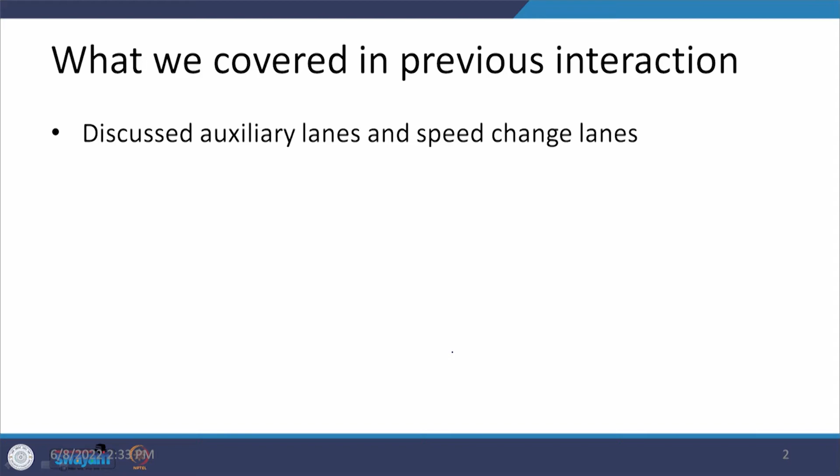Dear students, let us continue with the intersection layouts. In the previous interaction, we talked about the auxiliary lanes, as well as the speed change lanes, and in this category we talked about the acceleration lanes and the deceleration lanes.

In today's interaction, we are going to talk about channelization. Within channelization there are different types of islands which can be provided to control the traffic in terms of their path or direction. We are going to talk about corner or directional islands, center or divisional islands, and the various practical issues observed along with remedial measures so that intersections become safe and traffic movement remains efficient.

Apart from these, there are a few other things also which we are going to take up in another interaction. So, let us start with channelization.

Now, what exactly is channelization? It means we are trying to segregate or channelize the traffic flow, which is also defined as a stream, with different movements at any intersection. If we try to do this by use of different devices or physical features, this is what we call channelization.

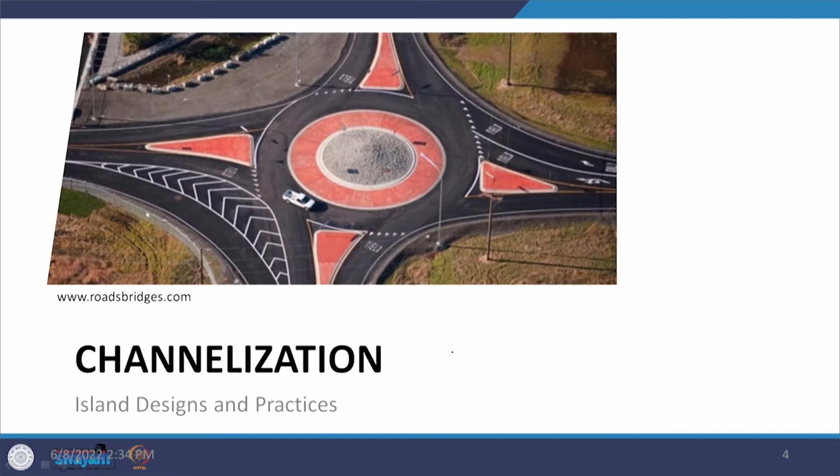If you look at this photograph, it tells us what type of channelization can be there. Here you can see there is a central island, other islands provided at different locations, and markings also taken here. All of these together define in which particular area, in which direction, and how those vehicles are going to move.

So, what are the objectives of channelization? The objectives are controlling the speeds of vehicles, and we may also control the path of vehicles so that whatever conflicts arise because of those paths can be omitted.

We can provide separated lanes so that conflicting traffic does not come onto the same lane. We can accommodate vehicles for different maneuvers, or reduce excessive carriageway areas to assist pedestrians to cross at a defined location, or place traffic control devices on these islands for segregation of traffic or directing it in a particular direction.

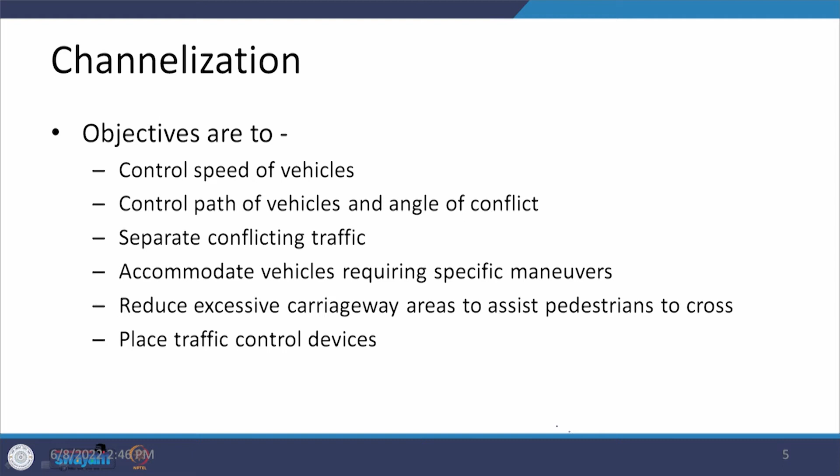Keeping these objectives in mind, let us try to see the various forms of channelization that can be there, and how we incorporate various things at an intersection so that the system remains effective. We have two photographs here.

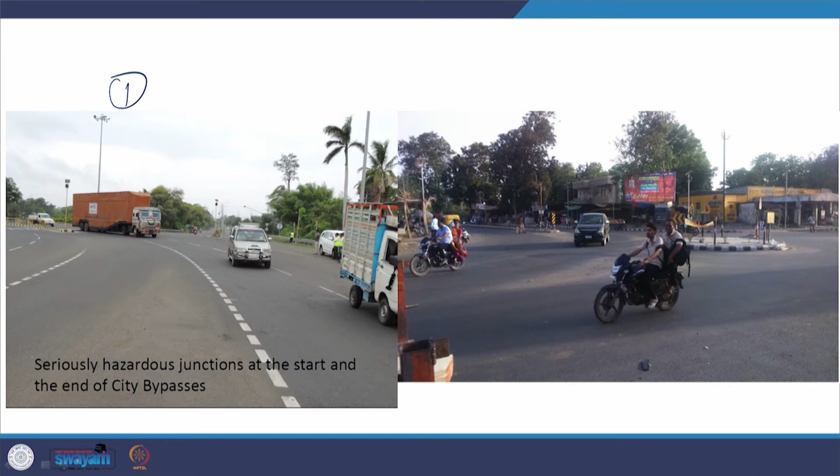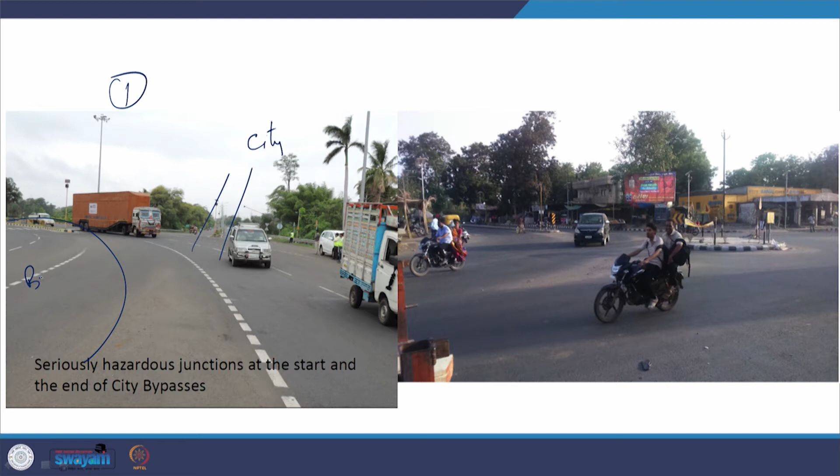In the photograph on the left hand side, you find traffic moving on this circular road, and at the same time there is a road going inside. So there is a city here and this is a bypass. The connectivity of the city with the bypass has been provided, but there is a very big area here where a lot of interactions can occur if drivers start moving in different directions in different manners.

This is not going to be a safer condition because one vehicle has to go in this direction, another is coming in this form, this vehicle can go in this direction also, whereas this vehicle can turn in this form. So no segregation has been provided for different types of movements at this intersection, and this intersection is not going to be that safe.

Again, in photograph number 2, you can see there is a central island being provided. There is a median here with the required markings, hazard markings, which we have discussed under signs and markings.

But the issue is that whatever traffic is coming from here is getting ample opportunity to make this type of movement rather than coming in the proper form, and at the same time there is traffic which can go in this direction. So this is going to be a hazardous location — a conflict point because of this undisciplined movement being taken by a vehicle.

So this island which has been provided here should have been enlarged, or there may be some other mechanism done so that these types of movements are not allowed.

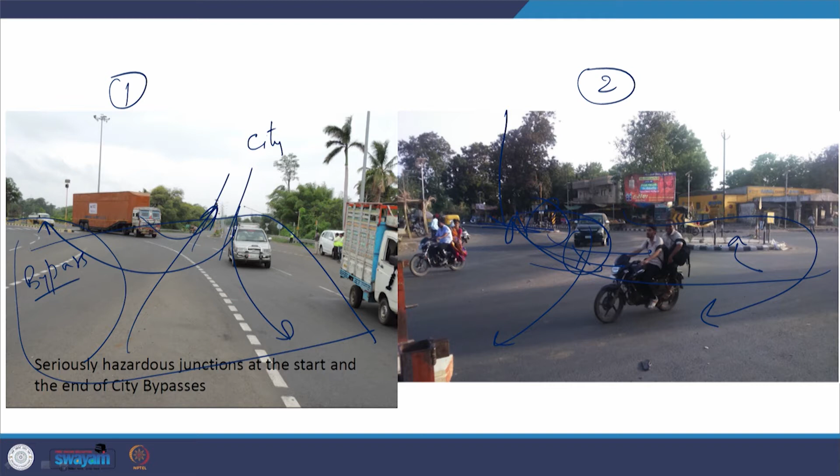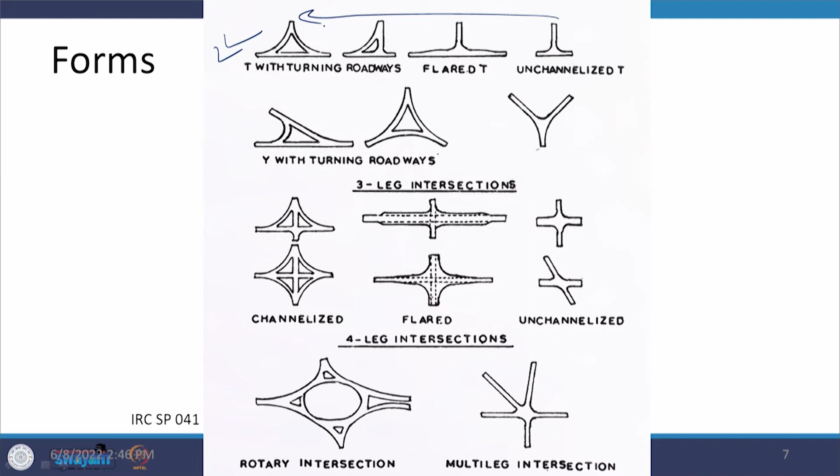These are the different forms of channelizations. We have looked at these forms previously when we talked about at-grade intersections. The point here is that we achieve the highest conditions in terms of segregation of traffic and their movements by way of channelization, moving from an unchannelized situation to these channelized situations, depending on whether we are talking about a 3-legged, 4-legged, or multi-legged intersection. So this is what we are interested to look at here.

Again, in this case what you can see is that here the right turning has been provided, in this one the left turning has been taken care of, but from the rest of the conditions like here and here, those things have not been provided.

Along with that, there are these types of islands which are just separating out the opposing traffic. So we have medians, we have these corner islands, and we have the divisional islands, and all of these together are providing you smooth movements.

Here also the same things can be seen, that there is a big island being provided, along with a smaller one here, and the traffic is moving all around it in terms of either these movements or these movements, and that is where things have been made better.

This is another case where a flared section has been provided, and at the one side the traffic can move either in a broken up condition, or some other reason is there due to which traffic can go in that direction, or it can be an emergency condition.

On the right hand side, in the first case a big area is there which is a conflict area, and this big conflict area has been reduced to a smaller one by way of the provision of these divisional islands, which are also controlling the path. So the path of the vehicles has been controlled and the conflict area has been reduced.

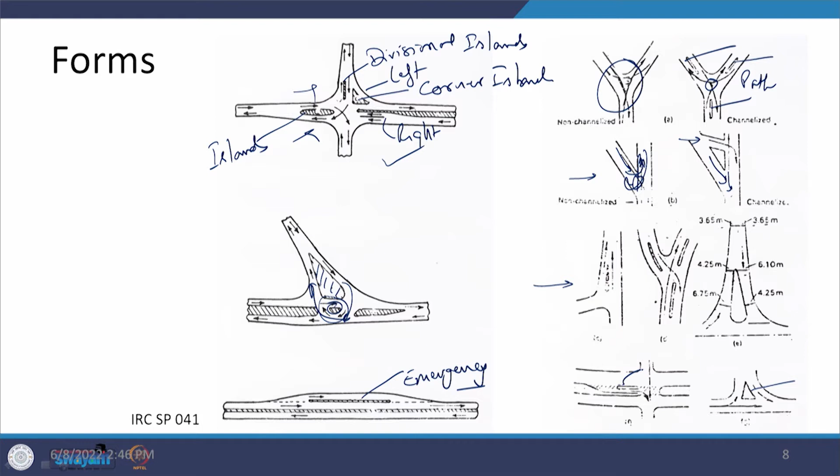So these are the things which we are going to talk about further when we take up one by one all of these types of islands.

Here, this we have looked at previously, but at that time in terms of conflicts. Here what we are talking about is that these two lanes being provided, if they have not been segregated out by way of markings or any other manner shown here very clearly, then these types of conflicts which otherwise are possible at these locations have been segregated out, and when they have been segregated out from each other, the number of conflicts is going to be reduced. So that is the advantage of doing the channelization here.

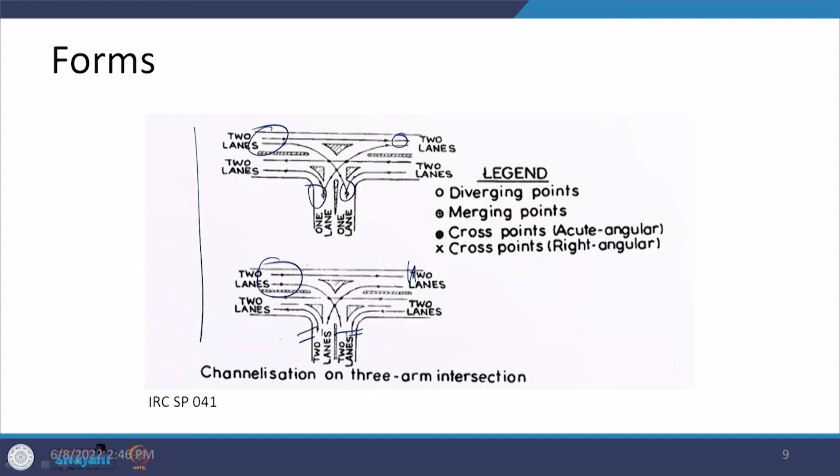So let us talk about the various types of channelization principles. They are related with the corner or directional island, the center or divisional island, or the third category is the pedestrian refuge island, which we have discussed previously when we talked about medians, and then the influence of the various types of traffic on all of these things, that is what we are going to look at.

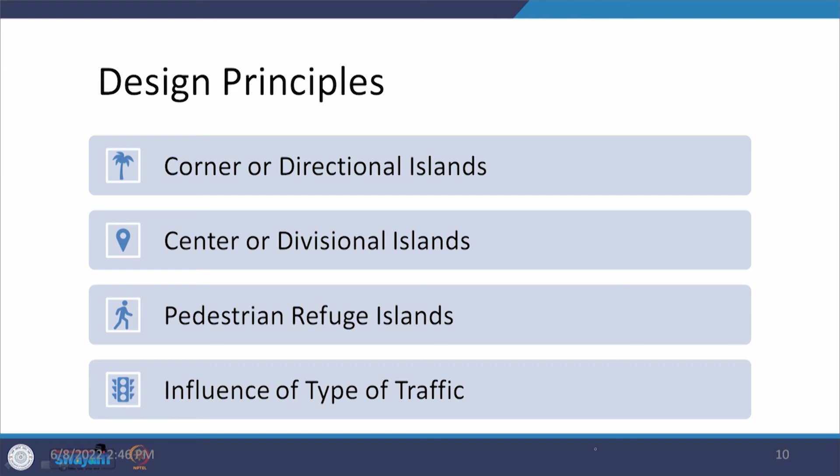So starting with the corner and directional islands. The very first thing is that these are usually triangular in shape. So when you are talking about the movement in this form, you found that they have been provided in this manner, so the triangular shaped islands are going to be there. This allows the left turning, and the through traffic which is coming from the other direction is being taken care of here.

Now, when we provide these type of islands, what should be the minimum size? That minimum size is defined by the particular area in which it is provided. If it is an urban area, then it is 4.5 square meters, but if it is in a rural area, then it is 7 square meters.

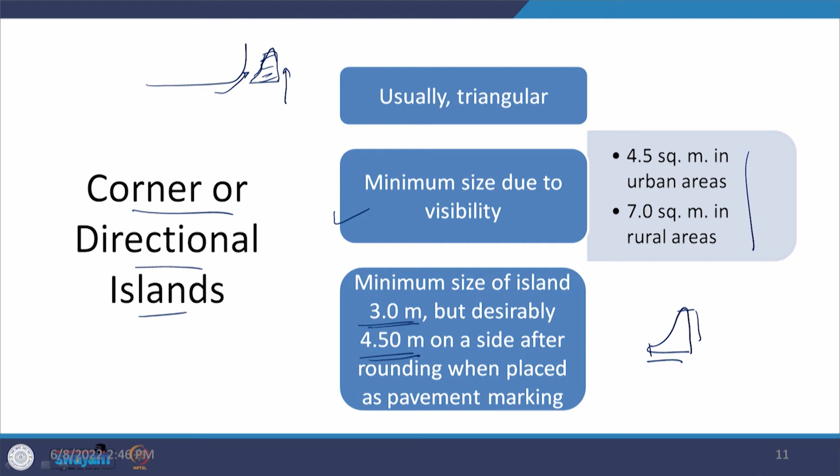Another thing is what should be the minimum size of the island at a particular direction. So if you are going to provide an island in this form, we look at these particular sides in terms of lengths. The minimum size is 3 meters, but desirably 4.5 meters on a side after the rounding off of the condition. Because when doing this rounding off, you have a radius provided at these locations, and this corner radius is usually 0.3 to 0.6 meters.

When you have provided this island in this form and traffic is moving on this lane, there is a lane marking, an edge marking, which is going to be there. Similarly, there is going to be an edge marking here. So this is the edge marking.

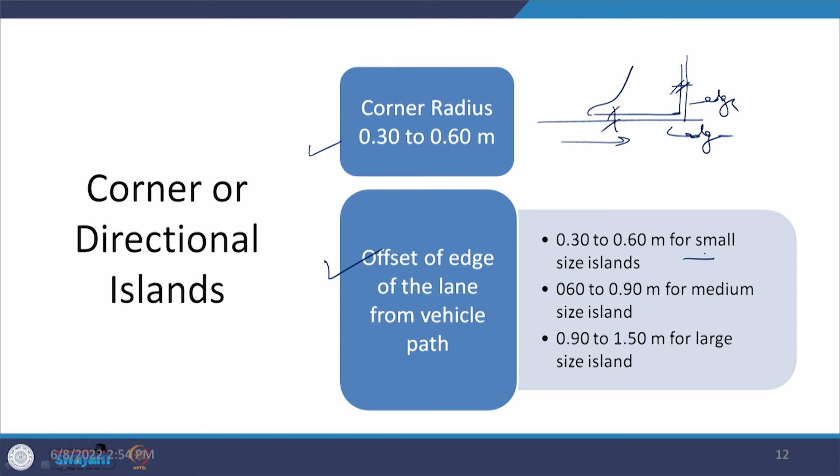Now this edge marking is going to have an offset. This offset is being talked about here. It says that on the basis of the type of island being provided—say a small island, medium island, or large island—these offsets are going to vary from 0.3 meters to 1.5 meters. So various values are there: 0.3, 0.6, 0.9, 1.5 meters, likewise these values are going to be provided.

This offset is increased from 0.6 to 1.8 meters if there is a curved section, and this is decided on the basis of the type of vehicle, because vehicle sizes are different, their turning radii are going to be different, and the design vehicle considered at that particular intersection is going to govern these type of decisions.

Then another thing is the flare length, and this flare length is minimum 0.3 meters and approximately 5 to 10 times the offset.

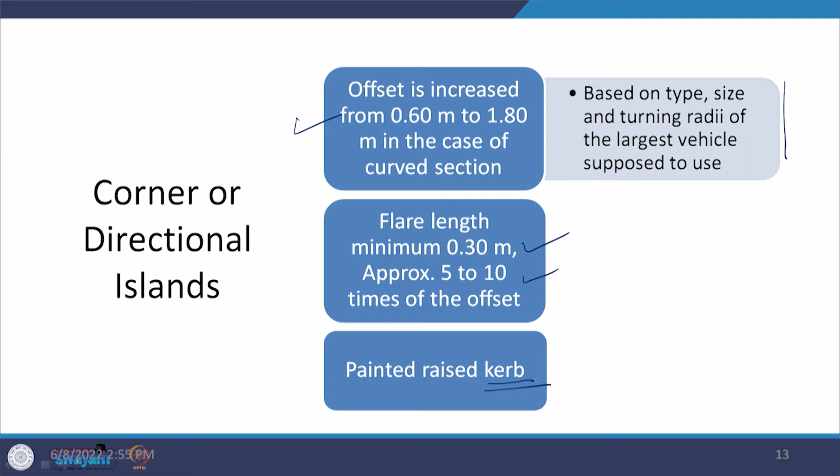And curbs, when they are being provided, are raised curbs, meaning a curb stone is used here, and they are painted so as to define that this is an obstruction, and therefore the vehicles should remain away from this particular obstruction.

So here whatever we have discussed has been shown, as we can see now. What we are talking about is the corner radius—in the case of a small island being provided, it is 0.3 or 0.6 meters as you can see, whereas the offset shown is 0.6 meters. When you talk about an intermediate one, here again this is 0.3 to 0.6 meters. On this side the curve radius has been changed to 0.6 to 0.9 meters, whereas on the other side it is changed to 0.6 to 1.5 meters, and then the offsets are again there.

So what you see is that this offset is 0.6 to 0.9 meters, but in this particular case the design is done in this form. Here this offset stays constant, but when looking at the offset here, this offset and this offset are going to be different. So we have this as an edge line and this one as an island. This is what is being shown: on this side it is 0.6 to 0.9 meters, whereas on the other side this offset is 1.2 to 1.8 meters.

This flaring is being done because it creates a constraint condition as you reach the last position, but otherwise if the vehicle is coming from here and gets out of control a bit, it is going to hit the islands, and that is what we are trying to eliminate.

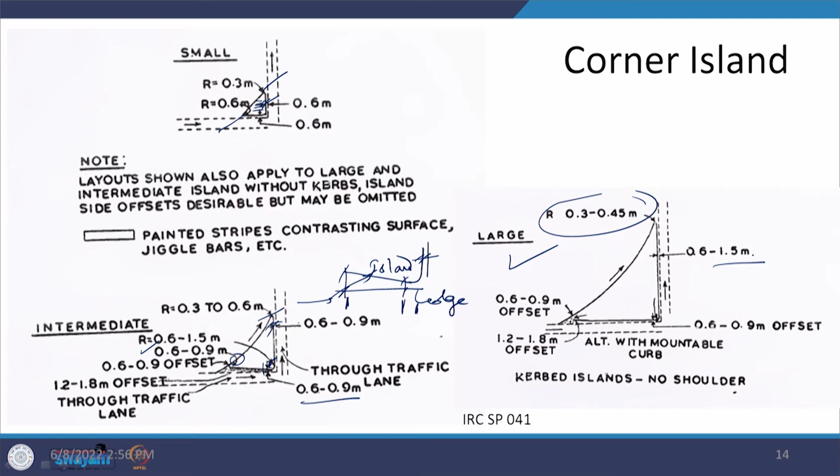Now this is the case of a large island, and in this large island again you find that the radii have been defined—this radius is 0.3 to 0.45 meters here. Along with that, the offsets are again defined, and since this is a bigger size, they go as high as 1.5 to 1.8 meters.

Now, when you are trying to trace it out and make the extremities of the path, the things we discussed were that we should go for either a simple circular curve, a transition curve, a simple circular curve with an offset, or a 3-centered compound curve.

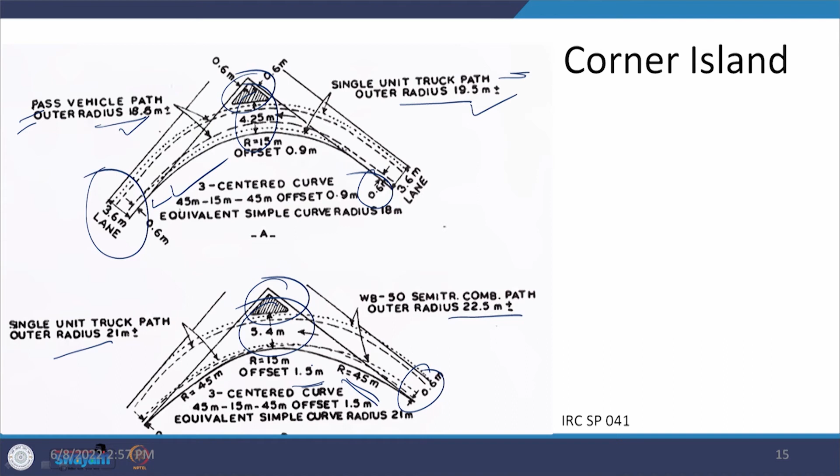In all of these cases, in the first case we have 0.6 meters of offset here, but when you come towards the center, this offset in the second case increases to 1.5 meters, while in the first case it was only 0.9 meters. So those things are also going to be different.

Now, this is another case where you again have a semi trailer with 22.5 meters outer radius, but in the case of the compound curve, the radii have been changed to 54 meters, 19.5 meters and 54 meters. So these are all type designs, meaning just examples. If you are going to do it in actual form, you have to check and find out what is going to suit that particular location.

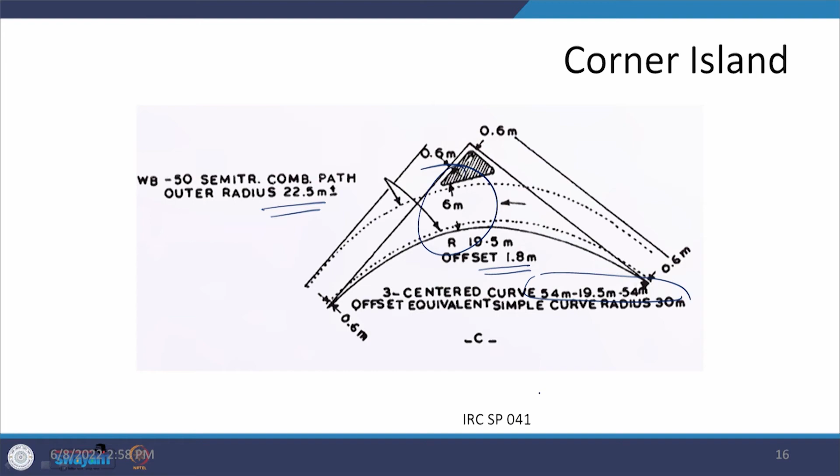But in this case the width at the center increases to 6 meters and the offset comes to 1.8 meters. These are the things which are going to happen, and that is where you have to see how much land is to be taken, how the lane markings have to be done, so that movements remain smooth.

The next category is the center or divisional island, and these islands are quite important because they segregate opposing traffic as well as provide an opportunity for right turning traffic. So their location and alignment become quite important in that sense.

If the size is smaller, it provides more space for vehicles and they may deviate and take a wrong path, creating a conflicting situation. So how they have been provided, at what location, in what length, and at what size becomes quite an important issue.

What it says is that in front of the island there should be a clear area, and this clear area should be 1.5 seconds travel time multiplied by the approach speed. So if we are talking about this center or divisional island, say this island has been provided as such, then in front of it we are going to have this clear area.

Now there are two objectives. One is that at a distance away from the island it starts segregating out the traffic, and the nose of this island is getting protected, because the vehicle is not going to hit it, as they have started doing those maneuvers before.

An area is marked and gives a funnel effect due to the excess width at the nose. So the width here is higher, but at the other side it is going to be lower, so it is a funnel effect which is coming. Turning radii should follow the turning radius.

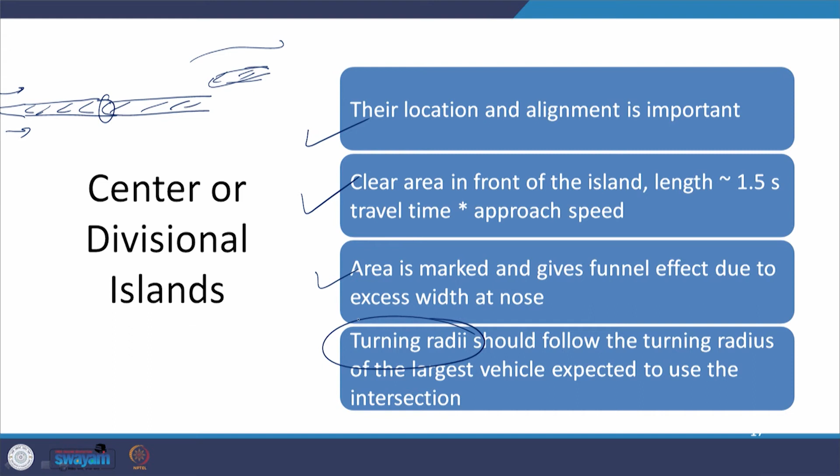Another thing is the approach length of the island when it is reaching towards the intersection. What should be that length? This length should tentatively equal the distance travelled in 3 seconds at approach speed. So if this is the length which is going to be there, this is what is being looked at, and here we have chevrons, and at this point maybe there is an intersection.

Now, along with this length there is going to be a width. This width should not be less than 1.2 meters and length should be 6 meters. As far as possible we should try to provide this. If there are exceptional conditions, the width can be reduced to 0.6 meters, but then again we have to see what is the volume of pedestrians who are going to cross at this location.

Second, there is a requirement for provision of traffic control devices, and if you are providing those traffic control devices, then at that location we need to determine what is going to be this setback. These placements we have already discussed when we talked about the placement of traffic signs.

Now, when you are looking at these islands, the island shape is going to be determined by various factors: the wheel track, the radii of turns, the island nose radii, approach width, geometry of the island, and excess space which needs to be covered in this particular island.

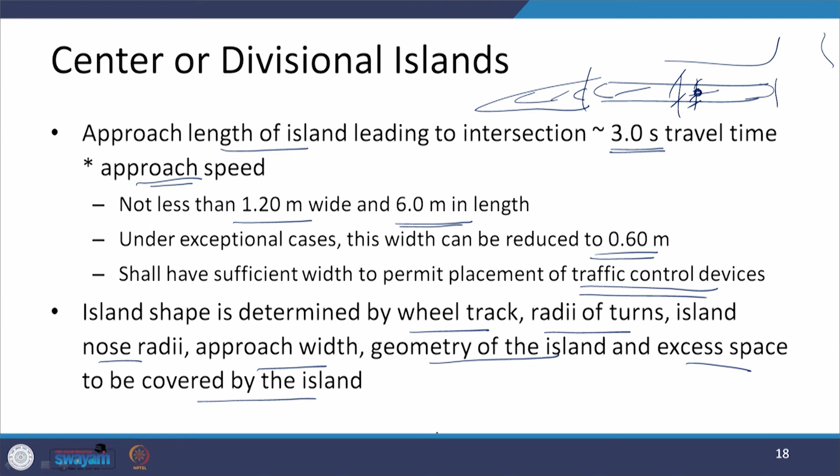Let us see what type of shapes can be here. One thing which is very clear from these diagrams is that whatever is the shape of the intersection, the shape of the island is adjusted to that. If it is a curved section, then we have a curved section here. If it is a flared section getting normal, we have this type of system. Here you can see different types of curves in different directions. So this is one thing which needs to be taken care of.

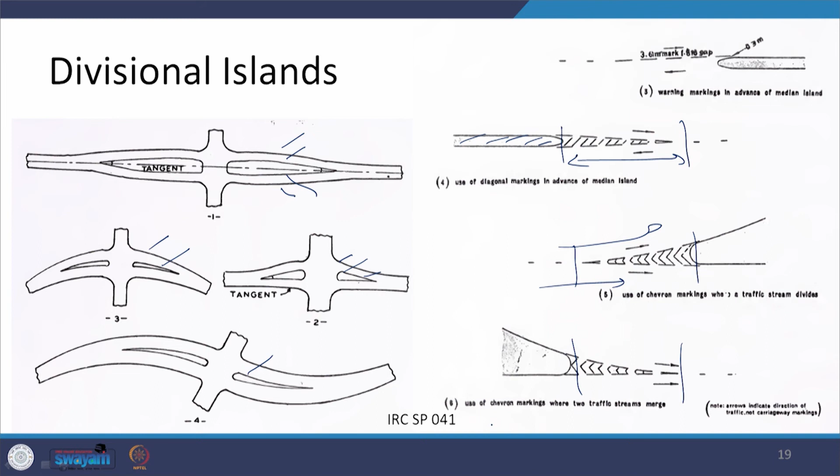Another thing we have discussed was the open area which is going to be in front of the island we have provided, in any of the directions. So when the traffic is coming from this direction, this is what we are looking at. Similarly, this is another thing we are talking about. The chevrons, how they are provided, we have already discussed, so there is no need to discuss it again here.

Here is another case where we are trying to trace the turning radii of the vehicles, and we have this right turning lane being provided by way of provision of this median. At the same time, there is a center or divisional island being provided here. Now, when the vehicle is moving from here, the path has been connected in this form, so this smooth path needs to be taken care of.

Second thing is that there is an easing out of this kinked section or the tangent section which is there because of the connectivity of the two roads, and this is done by way of provision of a radius, which as shown is taken as 12 to 15 meters on either side. That helps for the smooth movement of traffic like this.

Another thing is the nose of this island, as well as there is another island here, and the nose of that island. Now this nose of the island has been set back. Set back from where? This is a tangent line, and this tangent line is extended here and it touches the tangent line here. So this is the line which is coming here, and this is the setback we are getting.

Similarly, if we talk here, this tangent line is being extended, and this is the setback we are talking about—this setback is 3 meters. So we are taking the nose of the island 3 meters away from the point where the tangent meets at the two intersections of the nearest edges at that point.

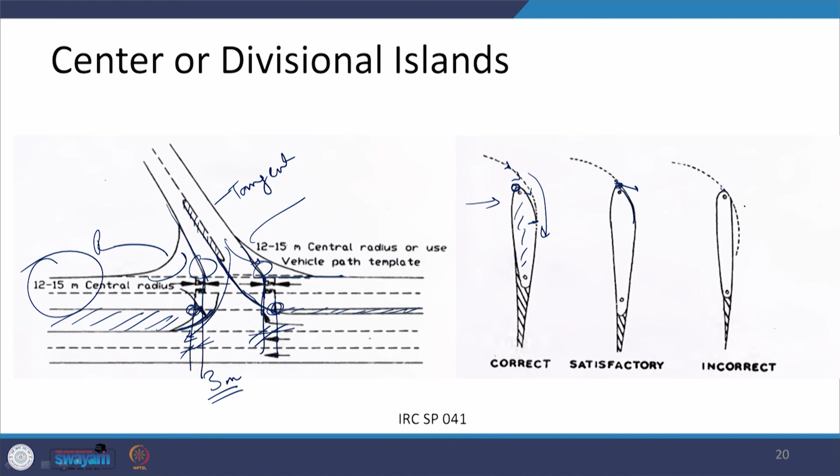If it is hitting at this one, this looks okay, but at the same time it is going to be deflected because the shape has been provided in this way. But in this case, this is going to hit and there is no deflection, and it may come back—therefore this is not going to be correct. So most of the time we should try to come up with this particular design.

Here also, what you can say is that there is a turning, so the island has been provided. First, this island is protruding inside the intersection area. Second, when there is a U-turn, this U-turn is consuming this much space, and if there is a vehicle coming in this direction going straight, it also has to deviate.

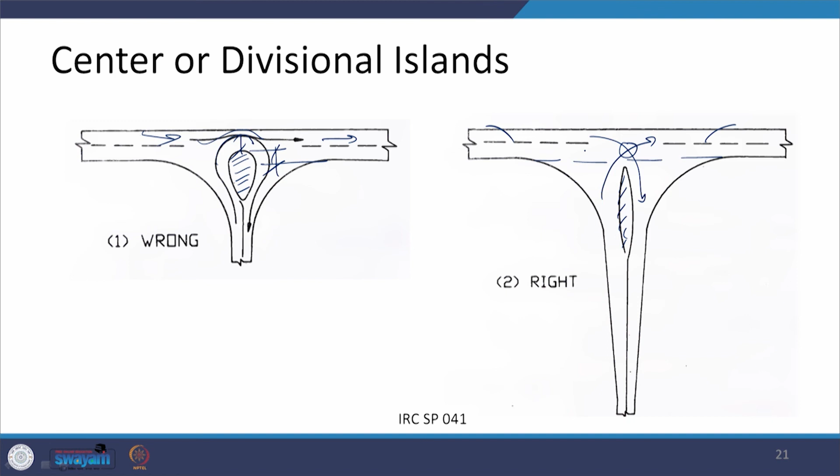Instead, if we try to provide this case, the island has been taken clear of the tangent line, and then there are markings coming here. So the traffic going in this direction, or traffic coming in this direction, has a smaller conflict area being created here. So this is a better design.

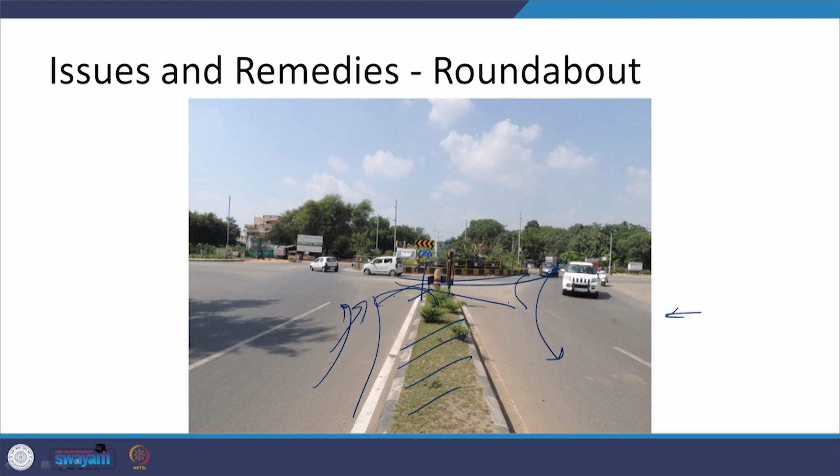Similarly, when the profiles are there from this direction, you can very clearly find it out—there is a marking here, a dust mark, that defines how the paths of the vehicles are happening in this particular area. So these also give you an idea of how we should try to design our islands.

Now this is another case where the traffic is taking a turn, and there is another traffic coming as through traffic, and they are going to have an interaction here which can be hazardous. So what is being done is the corner island has been provided along with the markings, and that is where the two paths have been segregated out. So this becomes a better design.

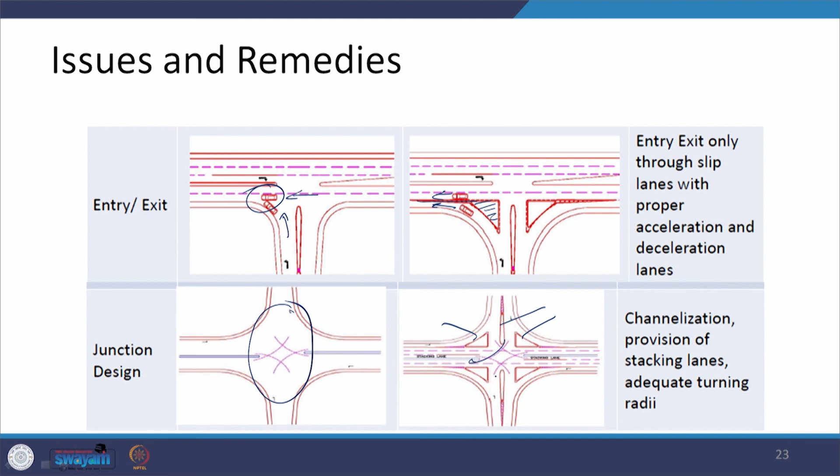Here again, ample opportunities for different types of interactions have been reduced by way of the provision of the corner islands as well as the divisional islands, and therefore now everything is getting quite defined in terms of how the various types of movements are going to be there.

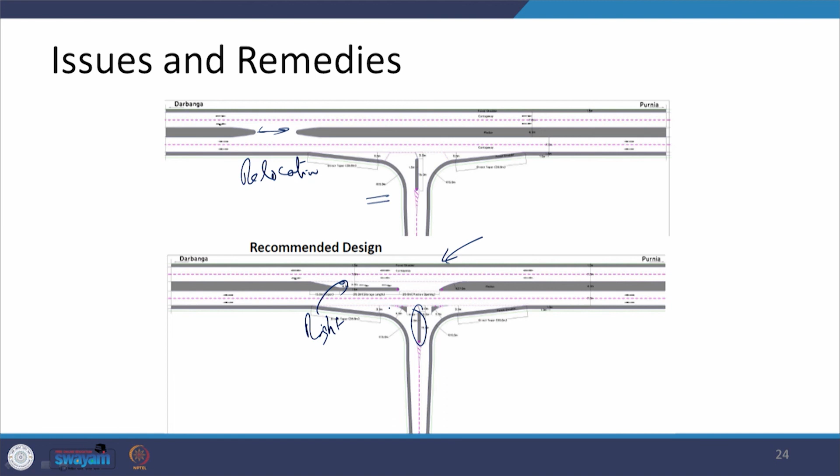This is another example where the intersection is here, but somehow the gap has been provided at this location. So what is being done is a relocation of this particular gap on the median—it has been brought at this level, and then a right turning lane has been provided. There is an island shown here, these are the divisional islands and the corner islands being defined. And now, with this type of taper and flare being provided,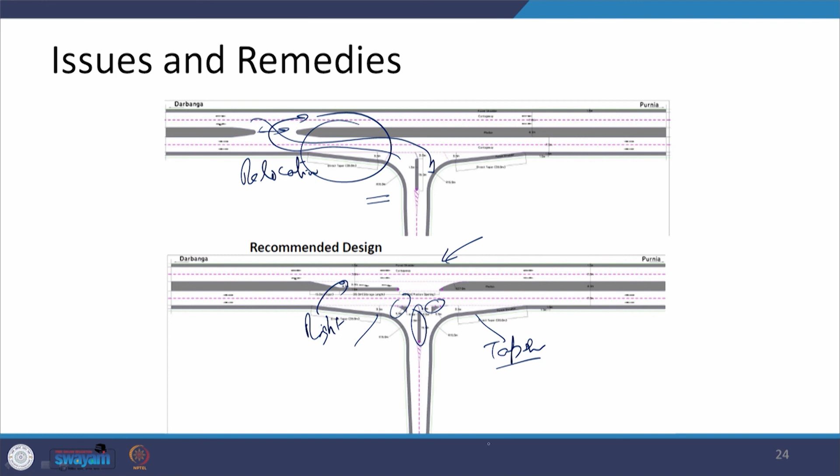most of the movements which otherwise would have occurred have now been controlled. Otherwise, vehicles could go in this form and vehicles could come in this way, so there would be a lot of conflicting conditions here, because there is traffic going straight also.

Let us look at another example here. This particular intersection is having a gap in the median at this level, but the total conflicting area is quite large. So what we have done is brought it to a level of around 90 degrees. The median which was provided in this form has been converted so that the right turning traffic can move.

Various markings have been taken care of, and then a divisional island is being provided, segregating the traffic in the left or in the right. Similarly, the traffic coming from the left side and taking a right turn is also being taken care of. So now this is a more systemized design.

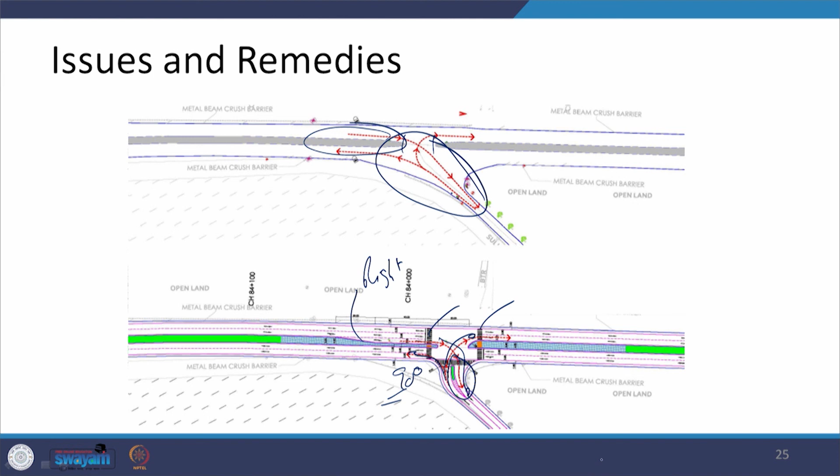This is another case where there is a flyover. The elevated road goes at the top, and at the bottom of it paths have been provided for the traffic coming from this direction, from that direction, or from the highway, or going onto the highway. So all of these types of interactions are happening in this smaller area.

Now, because there is a lot of scope available below this elevated corridor, different paths have been provided. When traffic coming from here has to take a U-turn, that is provided here. Traffic can continuously go on a service road, or can deviate and go onto the highway. Traffic coming from the highway can come out of this system and either take a U-turn or go out towards the service road.

This traffic can also come in this direction. The traffic coming from here can take a U-turn, go onto the highway, or go onto the service road. So every type of movement has now been taken care of through the redesigning of this area.

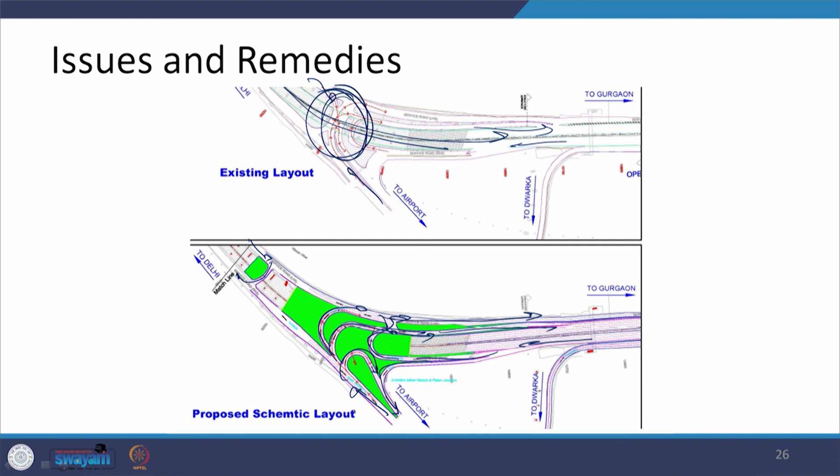This is another case where not much has changed. Only certain things have been made a bit better, and the gap that was there has been shortened, since otherwise a wrong maneuver could occur. This has been increased to such a level that now these two come at the same point. You can see this corner island as well as this divisional island coming together, and this forces the vehicle to take this particular type of turn. That is how it has been improved here.

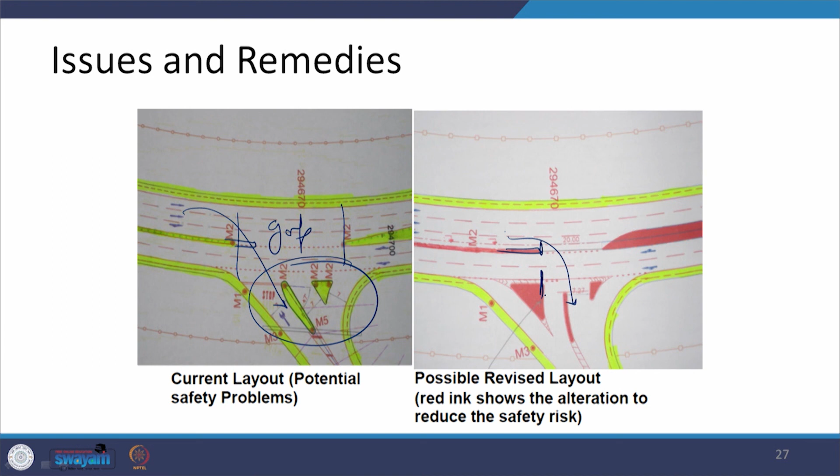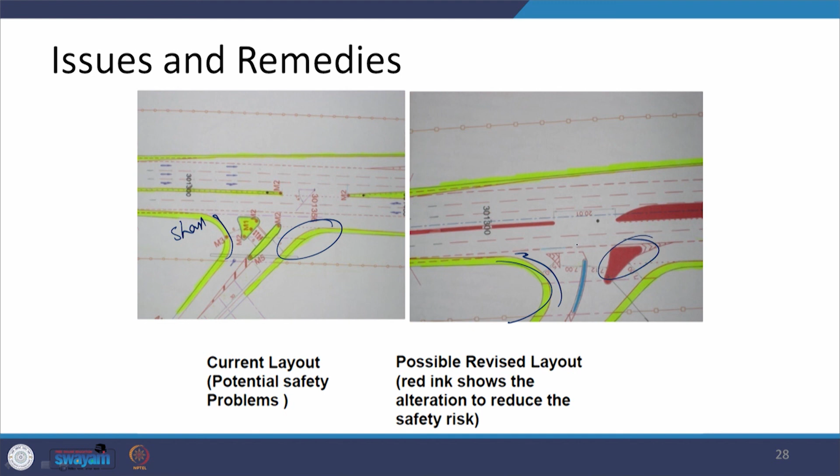The condition is similar in this one also. Here too, the traffic is taking a turn here, and this was a bit sharp, so it has been rounded. Now the curvature is quite good. At the same time, on the other side, a corner island has been provided, and therefore this movement can take place.

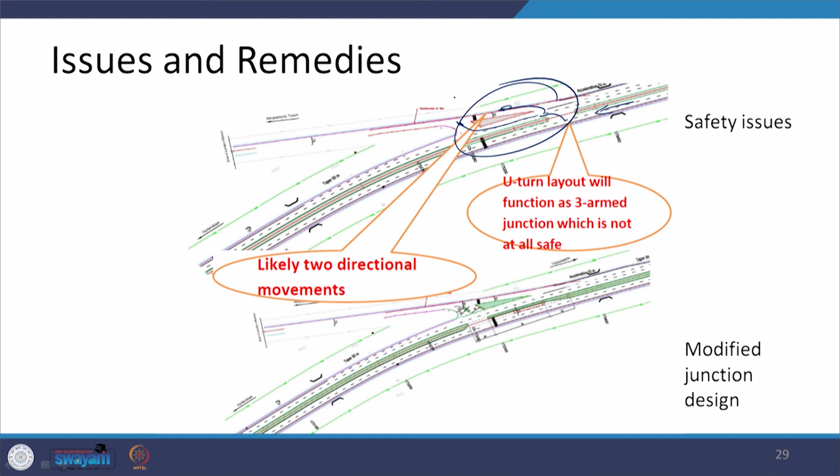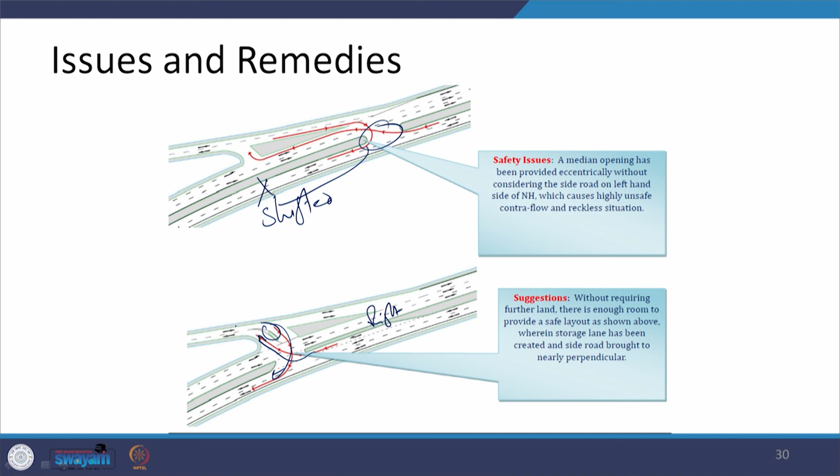This is another case where the traffic coming from this direction, if it has to go here, could take either this way or that way. This was going to be a big problem, and it has been sorted out as shown here. There is a right turning, and the gap has been shifted from here to this location, with the vehicle going in this form. A small island has been provided just to segregate these two directional movements, making it safer now.

This is similar to what we have seen for other directions. The main connectivity is at this location. A big island was being provided, but it was not creating a conducive environment for segregated movements, and this was a bigger area of concern. So the two things have been brought very near to each other, the gap has been provided at this location, and the island has also been divided. The bigger one has been made into a smaller one, giving us a smaller conflict area. These are the various types of cases which can arise, and you have to take care of these.